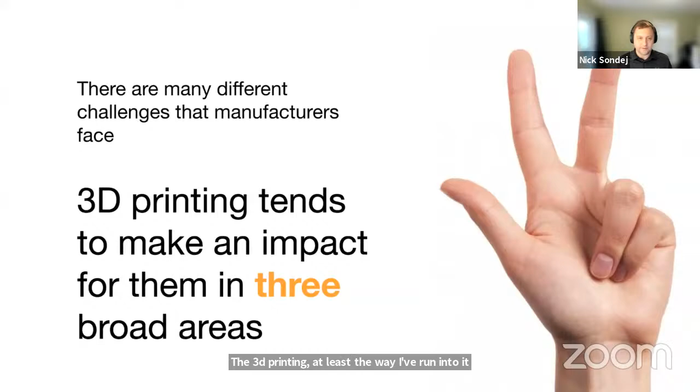So obviously every manufacturer is different, every manufacturer has different challenges, different economics, and especially recently, different supply chain and logistics issues. But 3D printing, at least the way I've run into it, really seems to make an impact in three main areas in industrial manufacturing. So we'll talk about these a little bit.

And it's really to drive value in reducing your manufacturing process costs. We'll talk about helping you optimize your supply chain, especially around things like tooling, and also giving you the tools to increase your speed to market with either new or existing products. So we're going to talk about all three of these in different ways today.

These are our high-level drivers of value that 3D printing can work towards. We'll use these as context, but then we're going to talk about some more specific examples. I also want you to think about this idea of immediate or direct versus operational benefits. In general, it's easy oftentimes to see the immediate benefit.

I realize this is a little bit of a silly slide, but it's easy to see what's in front of us, the immediate benefit - oh, let's just focus on that. But a lot of times those operational or organizational benefits really are a much larger piece of the impact that additive can have on you. So let's talk about what those two are right now.

Immediate benefits are things you can immediately see. So oftentimes this ends up being cost and lead time. For example, this is a part we did with Stanley Black & Decker to prove out what additive could do for their spare parts business.

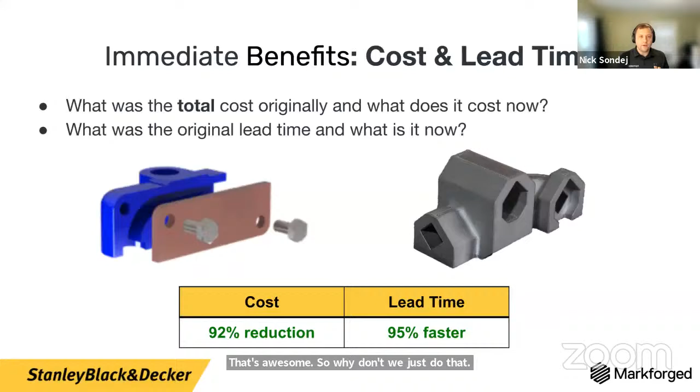What we'll find is that's great, but when you look at a lot of those immediate cost and lead time benefits, a lot of times you can get that benefit, but only every time you print the part. So if you want more of that impact, you've got to print more parts. And that can definitely drive impacts in your business.

What we usually see is that if you can improve a process, usually process improvements are going to drive these larger operational benefits. A lot of times that'll give you a point where you can print one part once, or maybe print a couple iterations of one part, but then put it into service. That part is then going to continue to drive and deliver larger recurring impacts for your company.

So we'll see this throughout the next couple of topics, but really thinking about those operational benefits, or how you can impact process and ongoing process, is really where a lot of times we see the bigger and more significant dollar value impacts coming from.

A couple things we're going to talk about today: cycle time and throughput, supply chain, things about how we can potentially help with inventory holding costs, efficiency on both your engineering and resource utilization side. We'll talk a little bit about line changeover and those moments when you're moving back and forth between different product lines. And finally, we'll talk about some EHS benefits, and also how additive can really drive an innovative culture shift at your company - that in itself is also a massive impact in the way your company can operate.

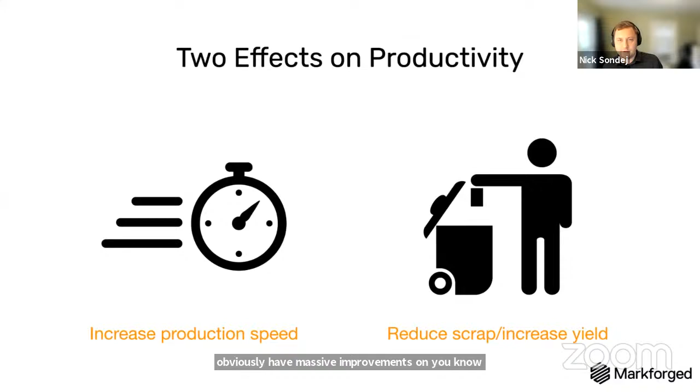Both of those can really obviously have massive improvements on recurring cost impacts to your process. So let's talk about a few of those.

The first one a lot of times is with end of arm tooling. If you're doing automation at all, mechanical automation, robotics, anything with grippers, tooling, etc., that impacts the payload of your automation system. So a lot of times you'll see people starting to look at printing end of arm tools, robot grippers, things like that, specifically for the lightweighting.

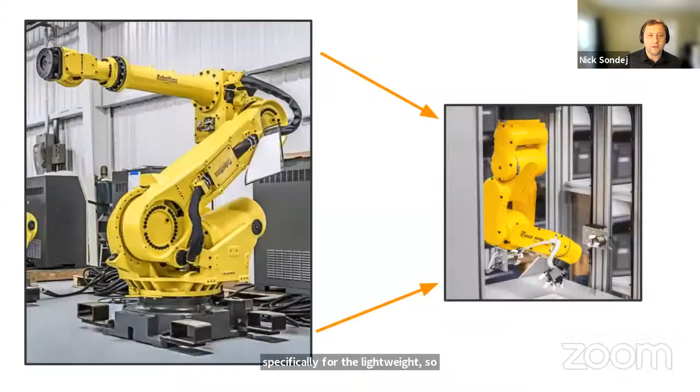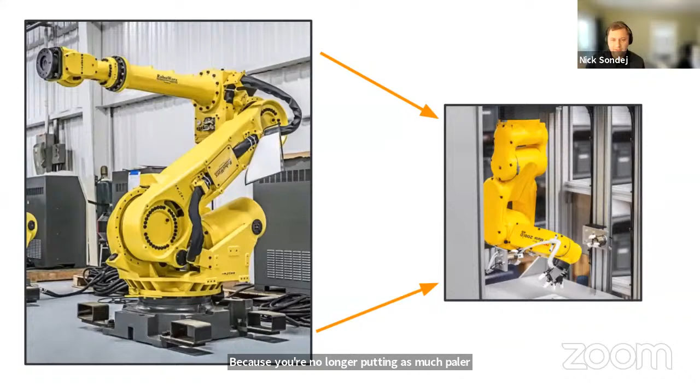If you can lightweight these things, you can potentially, if you're building up a new line, be able to go from a larger robot to a smaller one, and cut the overall cost or capital equipment costs of that new line. Maybe you're not going to go from a huge robot to a tiny one, but if you can drop the overall robot size you need, or the payload requirement, because you're no longer putting as much payload percentage into heavy hard tooling or metal hard tooling, but 3D printing it instead, you can significantly decrease the capital equipment costs of putting in a new line.

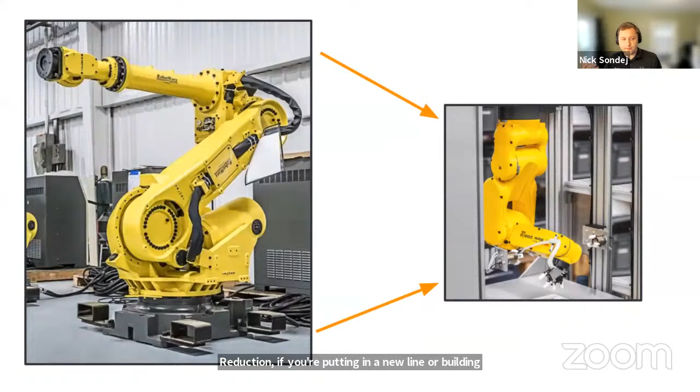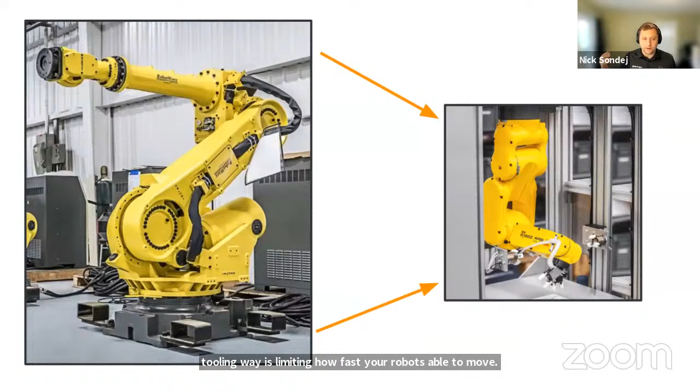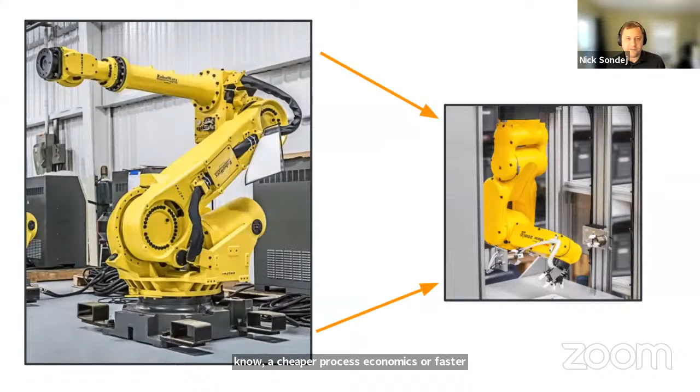On the other side, if you can drop the payload weight of your tooling, you may also just be able to run your robot faster. So there's a capex reduction if you're putting in a new line or building up a new manufacturing process, but there's also the fact that you can run a process faster potentially if your tooling weight is limiting how fast your robot is able to move. Either of those two impacts can result in cheaper process economics or faster productivity, faster cycle time. We see that a lot in industrial manufacturers doing automation.

When we're talking about cycle time, there are also a couple things you should be thinking about for how additive can make an impact here. A lot of 3D printed parts, especially ours, will by default have a honeycomb lightweight infill in them. This doesn't really reduce the strength very much, but it significantly reduces the weight.

So if you're going through a process where you have heat and cooling cycles and you're waiting for that part to heat up or cool down, especially with your tooling, a lot of 3D printed parts are going to have lower thermal mass. They'll use less material, so they'll be able to heat up and cool down faster. Or you may be able to design in channels to make it easier to heat up and cool down, stuff like that. That's going to allow you to speed up those processes and get more products through your system.

We also oftentimes see this with lightweighting hand tools, and we'll talk about this a bit more in the EH&S section, the environmental health and safety section. You may be able to lightweight hand tools, making it easier for your operators to move things around. In general, you're looking for ways to have a lower impact due to your tooling on the overall process speed. So if you're thinking about your own manufacturing operations and looking at how you could speed something up, or where things are being slowed down, think about whether there are impacts from that tooling on the overall process speed.

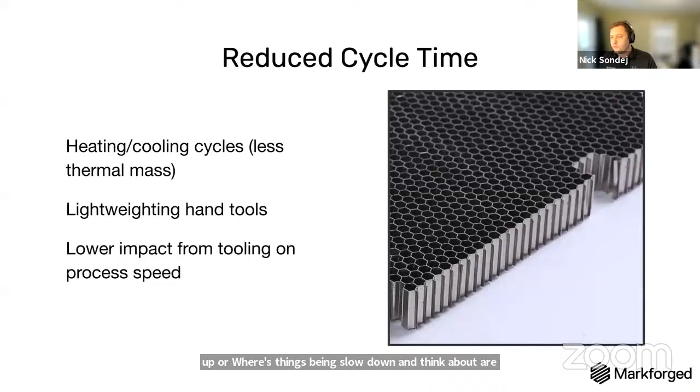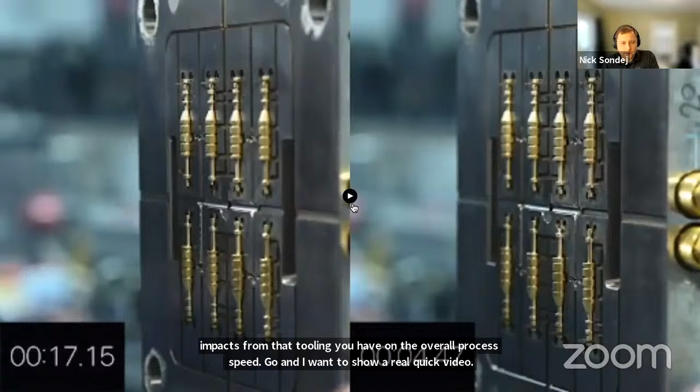Cool, and I want to show a real quick video. Steve was talking about this earlier in the interview Zach did, but this is an example of faster process speed due to a hand tool. This is being able to reduce your cycle time just with a 3D printed tool that makes it easier for an operator to run a process.

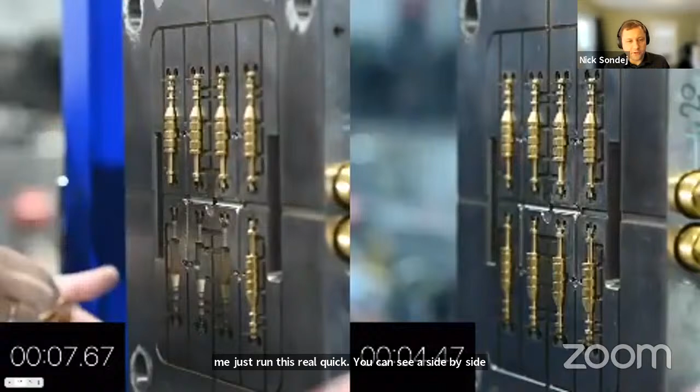So let me just run this real quick. You can see a side-by-side comparison of manually loading this overmolding tool one at a time versus having a tool that loads all of them at once. You can see we got about a 4x reduction in process speed just by having that tool load all of these at once. So that's a great example of reducing our cycle time, with overall process productivity much higher here.

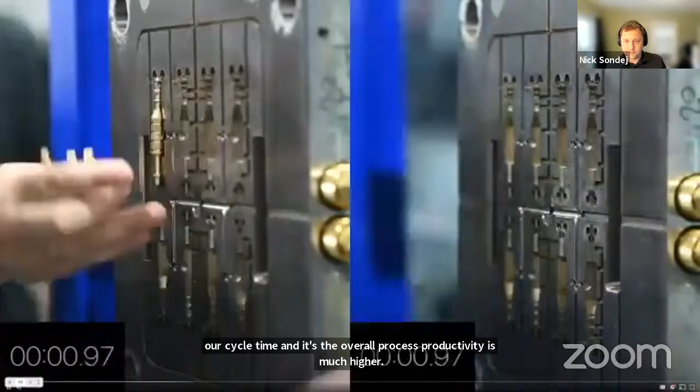Let's talk about more of those environmental health and safety benefits, because there's this idea of potentially cutting your cycle times or reducing your weight and making things easier for your employees. There's a lot of ergonomics and potential benefits there.

Some of the things we see across the board in manufacturing when bringing additive to employee tools, operator tools, etc., is increased ergonomics. Additive gives you the ability to create much more complex, much more tailored, ergonomic parts, so you can really dial in the ergonomics of your tools, make things more custom and lighter, easier to handle.

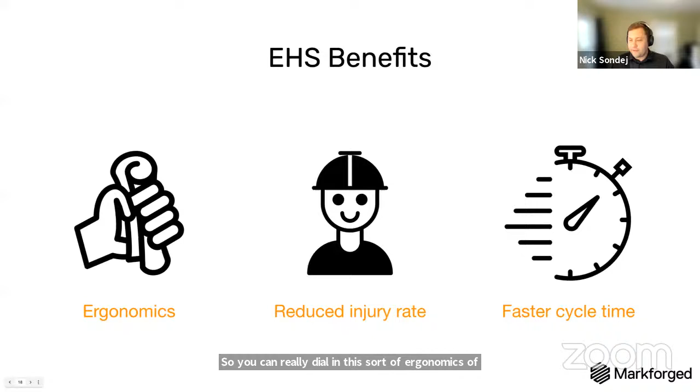That's going to drive up ergonomics, which often leads to potential for reducing injury rates, especially repetitive strain injuries and fatigue injuries related to heavy tools. We see a lot of industrial manufacturing customers drive better tools and better outcomes for their employees just by rethinking the way they make some of these tools.

The nice part is while you do those two things, you also get faster cycle times a lot of times. If you have an operator lifting something heavy for an 8-hour shift, but now you cut the weight of that tool significantly, they're going to get less fatigued over the course of their shift and have a much more consistent cycle time with less fatigue and less propensity for injury throughout that shift. So it's not only great for your operators and employees, but you're getting much better consistent productivity out of those things as well.

Next, let's talk about supply chain and logistics. I know that over the last maybe 1.5 to 2 years, this has become more front of mind for a lot of different industrial manufacturers and supply chain people.

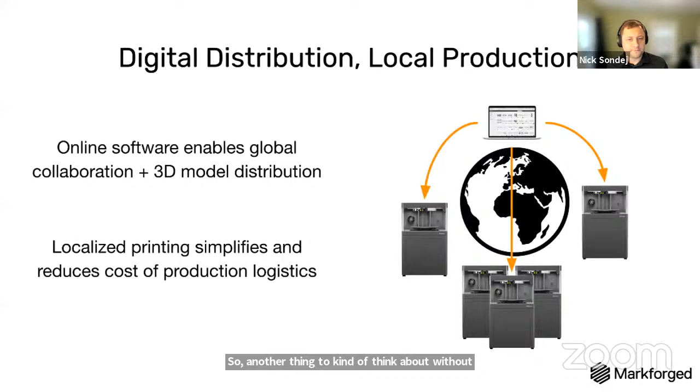So another thing to think about with additive is inventory, specifically inventory holding costs. We see this a lot with industries holding significant amounts of tooling that they're not necessarily using every day, but it represented such a capital expenditure or fixed cost to the manufacturing process that they keep 5, 10, 15, 20 years of tooling around just in case a customer decides to order something again. This is especially common in the casting and foundry industry, but there are other examples as well.

If you're holding all that inventory for 5, 10, 15, 20 years or longer, in some cases you're being taxed for that tooling inventory. Even if not, you may have facility overhead because you're maintaining a larger warehouse just for tooling that doesn't get used all the time, and you're paying labor to run that facility. You're spending a lot of time and effort holding inventory that may not actually be creating value for you. The alternative, especially with tooling, is if you can 3D print those tools on demand, and you're probably not going to see that job for another 10 years, you can scrap the tool and just keep the digital files for it. If that job comes back up, you reprint the tool, but you're no longer holding that inventory around, reducing the drain on your business.

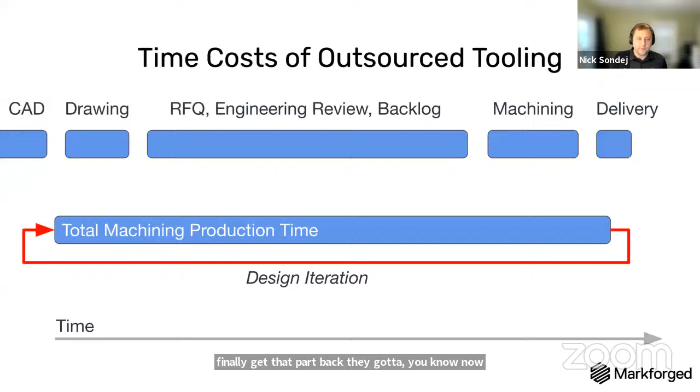In that meantime, the engineer has gone off to other projects because they're not going to just sit around for 2 weeks. So there's a big switching penalty too, because once they finally get that part back, they have to think about what they did 2 weeks ago. With 3D printing, you cut out a lot of that overall time - you don't need to make a 2D drawing from your CAD, you start directly from a 3D model. There's no RFQ, engineering review, or backlog process with an external supplier, because you have the whole thing in-house. Once you're done with the CAD, you just send it to the printer.

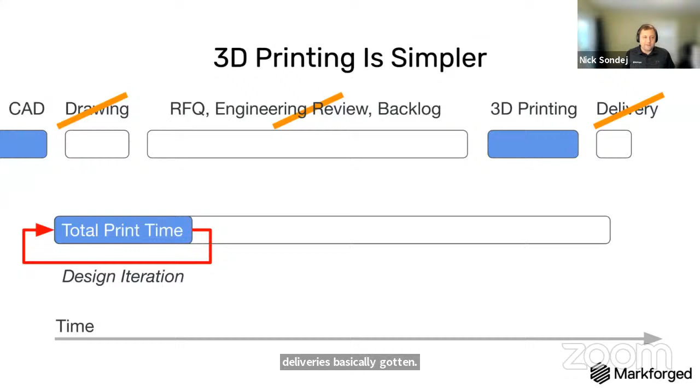So there is still some printing time, and delivery's basically, you probably walk to the printer and pick it up. So your design iteration time has significantly been reduced. And this is where it gets really important for thinking about how your engineers are focusing. In that same amount of time it took to get one machined, outsourced tool, you can get a couple different iterations of that same tool.

So there's two options here. One is that you're producing that same tooling in a significantly shorter amount of time, or in that same amount of time, you're getting a significantly more mature design because you've gone through three iterative rounds of testing and feedback throughout the whole thing.

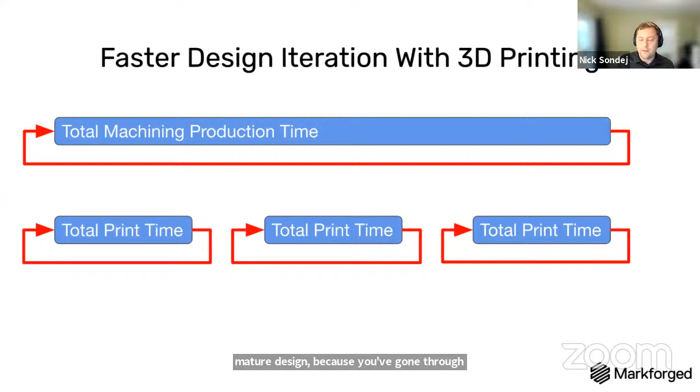And the best part for your engineering resources is that your engineers and designers aren't context switching every couple of weeks because different projects are coming back. They're able to really focus and preserve what they were thinking about and how they were going about solving that problem. They're not context switching between different projects all the time, because they can sit down, focus on a project, get feedback on it quickly, and then finish the project up or continue iterating.

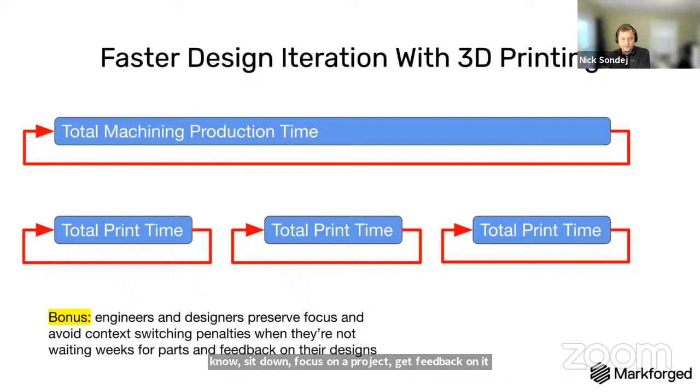Let's see if this works, but this is one of our customers, a window and door manufacturer. One of their engineers is talking about some of the tooling they were able to make for their production floor. I'll just let him speak for himself.

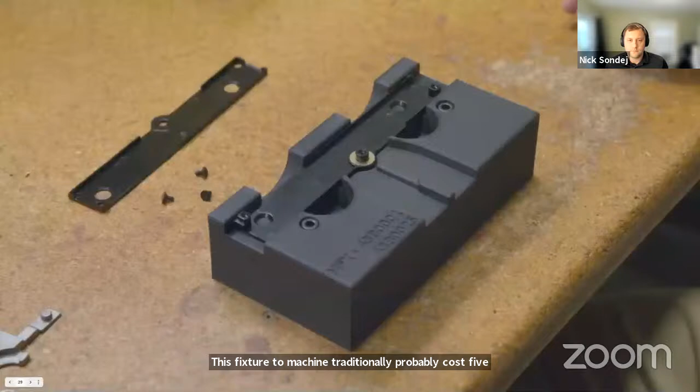This fixture to machine traditionally would probably cost 5 times as much and take 2 weeks to manufacture. I printed it in a day and they were able to use it that same day.

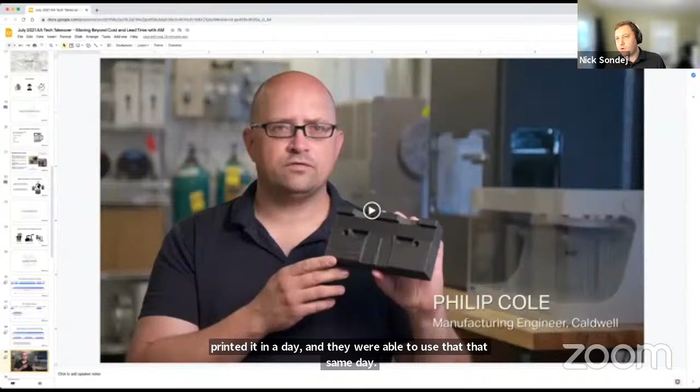Cool. So Caldwell makes all kinds of these windows and doors and different hinge mechanisms and things like that. We see this all over our customer base, where someone is able to really quickly solve a problem and actually see it in action later on, that same day or the next day. And if there's feedback from manufacturing, he can adjust and solve the problem and move on to the next thing.

Okay, so just a couple more of these deeper impacts to be thinking about. Another one is resource utilization. This one is focused more on the actual machine resource utilization.

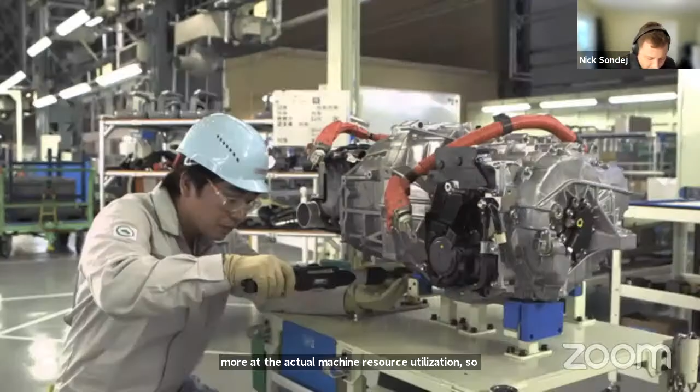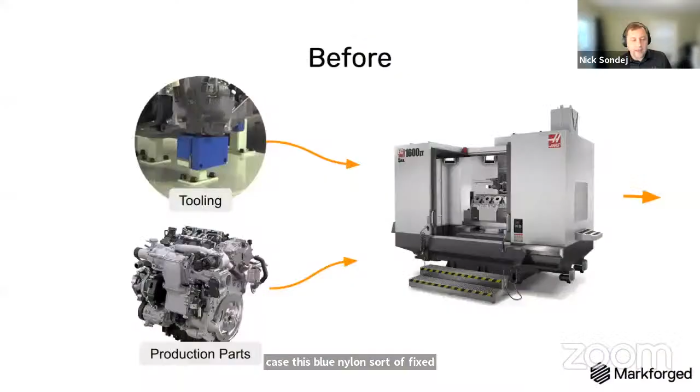If you look at an example from a production facility, in this case maybe a motor manufacturing facility, you have the production part you're making, and you have some of the tooling that part is resting on, specifically in this case these blue nylon fixture blocks underneath. This may not be accurate for an automotive manufacturing facility, but a lot of smaller companies, and even some big ones, you may see that your tooling, your R&D, all the things you need to machine are going through a similar shop as production parts are going through.

We actually saw this with some large automotive customers where it wasn't their production parts, but it was all their rework parts, still production parts, going through the same shop as all their tooling. And so you get into these prioritization races where production always takes precedence. So then you might get behind on tooling, and eventually you need to get caught up on tooling, which means your production gets into a backlog. So you run into this resource competition.

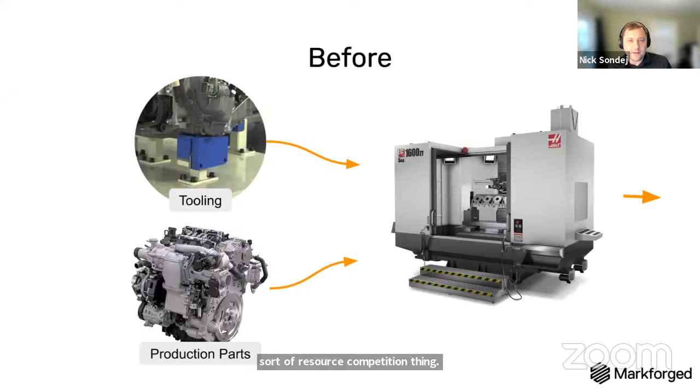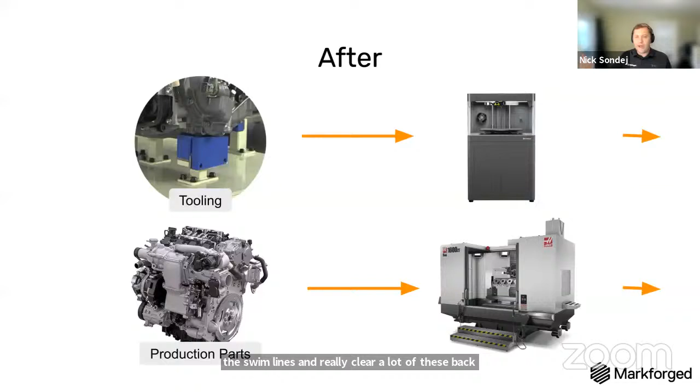But with 3D printing, you can oftentimes isolate some of your tooling to go down to the printer and leave your production parts to go through the more expensive, specialized machine equipment that you need to send those production parts through. This is a lot of times where you see customers or manufacturers using 3D printing or additive for tooling. They're able to establish these swim lanes and really clear a lot of these backlogs and production hurdles, because they're no longer competing for resources between production and their tooling and operations side.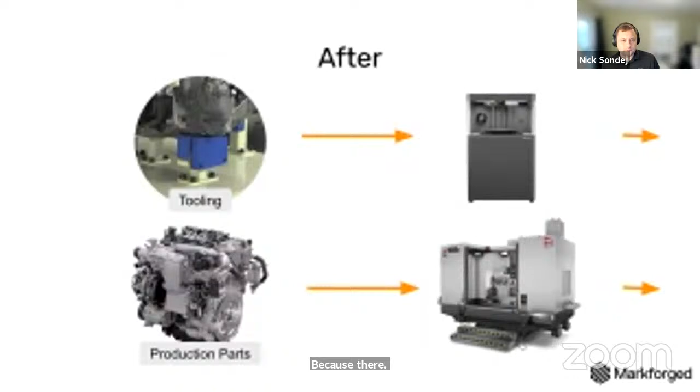We also can look at tooling up for new product introduction, or switching over lines and that changeover efficiency. If it's taking you a long time to initially tool up for a new product or product line, you can oftentimes do a much faster job of initial tool up with additive manufacturing.

Rather than waiting around for outsourced tools and supplier challenges to get the tooling you need, you may be able to do that a lot faster in-house and get your manufacturing process up and running faster, which gets you to market faster. The other side is changeover, where switching a line from one product to another can take a couple days. A lot of that is due to manual or semi-manual calibration, machine tool calibration, and getting manufacturing lines specific to one product. If you can print jigs, fixtures, and calibration devices to make changeover faster, you'll get to market faster and have more productive time with your line up and running.

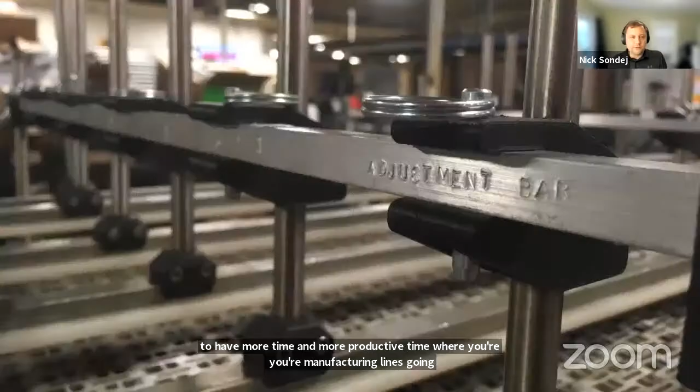A quick example: we had a customer feeding a robotic assembly cell with product, with multiple different products and sizes going through that cell. Every time they switched over and changed over that production cell, they had to realign the guide rails you can see at the bottom of this picture. That could take 4 to 6 hours, because these guide rails were all bolted into a bar, so an operator had to manually unscrew all the bolts, realign the guide rails, and screw those bolts back in.

So they 3D printed a better solution with quick pull pins, where they could just pull a bunch of these pins, adjust it quickly, and pop the pin back into a different position. They had numbering on some of those locations, and it dropped the changeover time from hours down to like 15 or 30 minutes. Now they're more agile every time they want to change over manufacturing lines, spending a lot less time and effort manually configuring or reconfiguring production lines. This is a good example of where additive speeds up the process side of things.

The last one we see a lot is fixing what I like to call cardboard or duct tape engineering. This often becomes a problem during changeover or tool up, because if an operator fixes a problem temporarily, like taping some foam to stop a product from hitting something, or manually readjusting something, when you change over the line you often don't know why that solution was done. It's tribal knowledge - that one person knew why it was done but it wasn't documented well. You run into issues where you change over the line and there are problems because you didn't expect to see that issue.

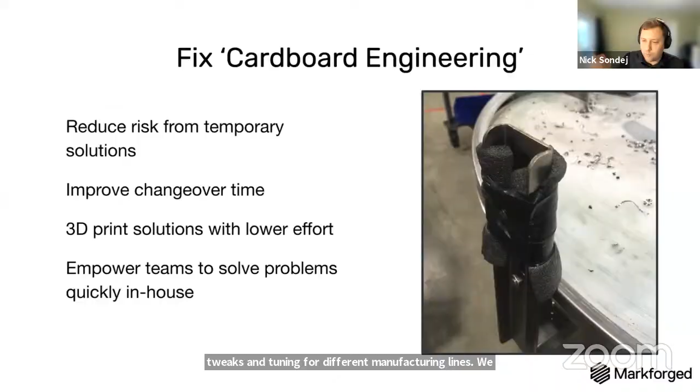We have a good example from one of our Project Diamond customers out in Michigan, Valentine Distilling, who had these brushes. Their bottling line is an Italian bottling line, designed for one specific type of bottle. But Valentine runs different types of bottles for their different products through this line, so they have to adjust these brushes to help ensure the labels on their bottles are properly applied. The brushes need a different position with every bottle.

Before, they had some sort of duct tape solution to hold this together, but it wasn't deterministic or easy to adjust. It added time-consuming, labor-intensive work to configuring those lines when switching over between products. These are fairly simple 3D printed parts, but they're incredibly effective because they allow them to perfectly dial in the geometries of these different brushes for every different bottle they run through.

And they're properly adhering these labels, cutting out that potential for rework. So going back to productivity and cycle time, they're reducing the amount of rework running through their line, which leads to better productivity and lowered manufacturing costs.

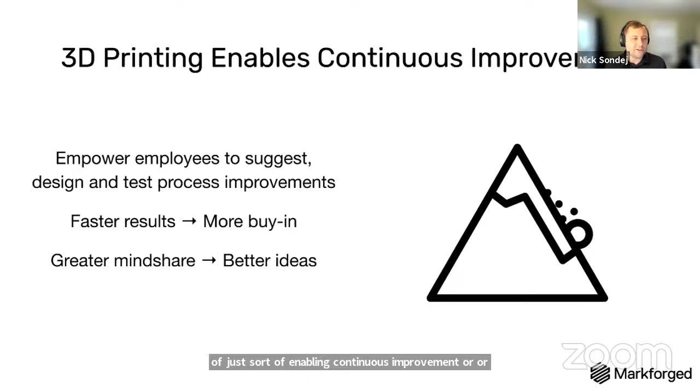I want to do a quick application case study on one of the tools Steve was talking about earlier, this claw-like hand tool for helping load parts into the overmolding process. We've talked about a number of these deeper impacts versus just the cost and lead time of producing a tool like this, so let's look at some of those deeper operational impacts.

First, cycle time. The easiest thing to look at is being able to put those parts in really quickly, about 4x or more faster reload time. The finished parts are ejected from the overmolding machine, you open the machine, pop all of those parts in at once, and you're good to go. So we've already improved the cycle time there.

But the other thing is that operators can load that claw in parallel while the molding process is occurring. Rather than slowing down the process to load 8 parts in manually while it's down, they can now load the claw while the machine is actually working, and then just pop all the parts in during machine reloading.

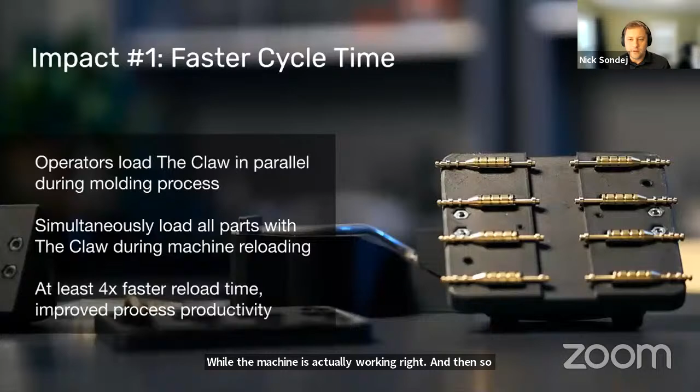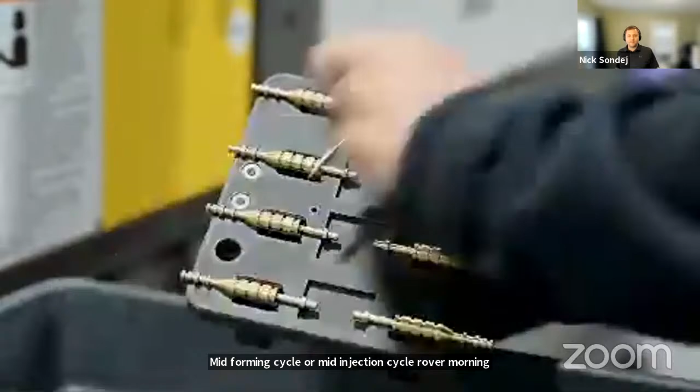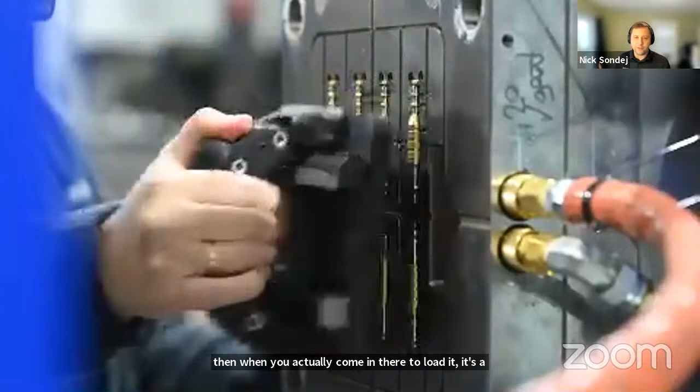Let's show a quick video of that. These parts can be loaded, as you're about to see, mid-forming cycle or mid-injection cycle, so the operator has something to do while the process continues, making it a bit easier. When you come to load it, it's quick, you put everything in, ensure they're snug, and the process continues. This parallelizes the process, leading to faster cycle time and better economics.

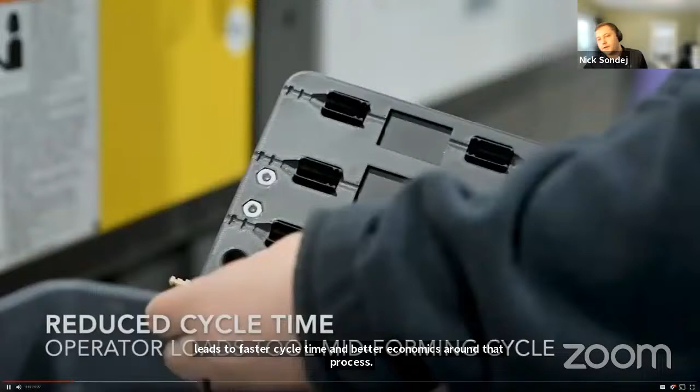And the second one he talked about is operator safety, right? So this is our environmental health and safety again. The operator avoids having to potentially contact that hot tooling surface. It's not super hot, but it's definitely still something where it's nicer for the operator to not have to touch or potentially touch the mold.

So it's a better loading experience, but it's also going to improve health and safety, employee morale, engagement, et cetera. And you can see you're just pressing those parts in with the claw now.

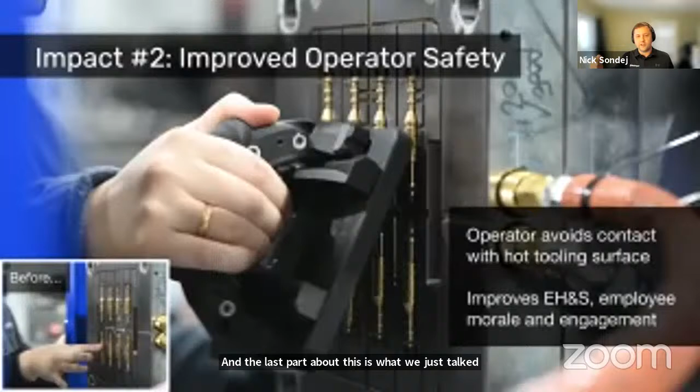And the last part about this, which we just talked about, is employee engagement. Employees can see those types of impacts, right? Engineers and operators can see those types of impacts and realize, oh, that was a great idea. I have another problem that I think this would help with. So I can drive continuous improvement myself by suggesting those ideas.

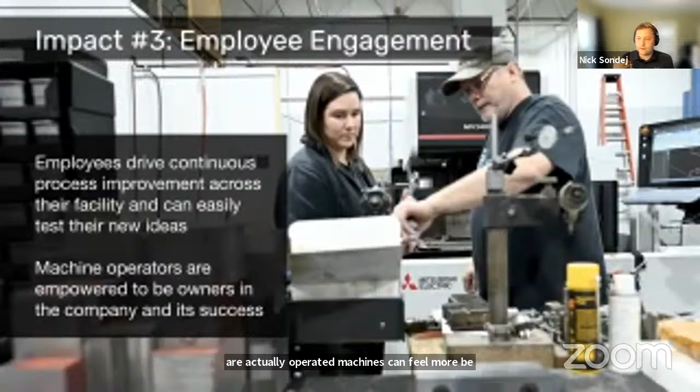So employees are more engaged in the process. Your operators and technicians that are actually operating machines can feel more empowered to be similar to owners in the company and its success, and help contribute to that sort of continuous process improvement.

And that's really the pinnacle of continuous process improvement, when you have widespread buy-in and engagement with that process, rather than it being one or two people running the whole process. If you have employees across the board spotting improvements or areas for improvement in your operations, you're now able to do much more significant improvement across those operations.

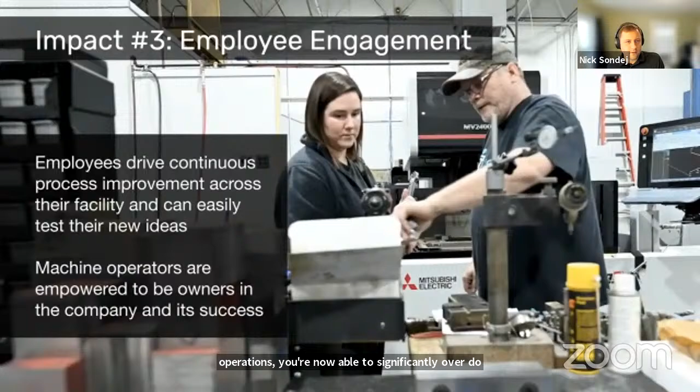Okay, so I talked a lot, but I'm done now. So any questions around this, thinking about some of these deeper impacts or additional impacts?